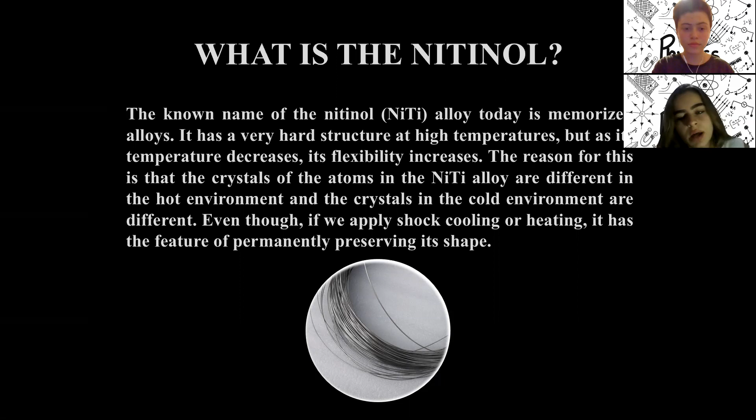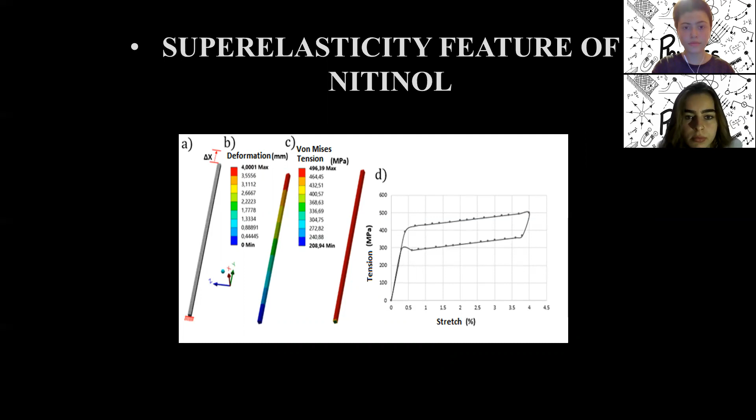Now I will focus on one of the properties of nitinol, which is shape memory. As many people know, the mechanism of the shape memory alloy works differently. If the internal crystal structure and shape of an object made from shape memory alloy is deformed, it will not return to its original shape when the force on it is removed. However, if you apply some heat, the deformed crystal structure changes to a different form, meaning it reverts to its programmed shape.

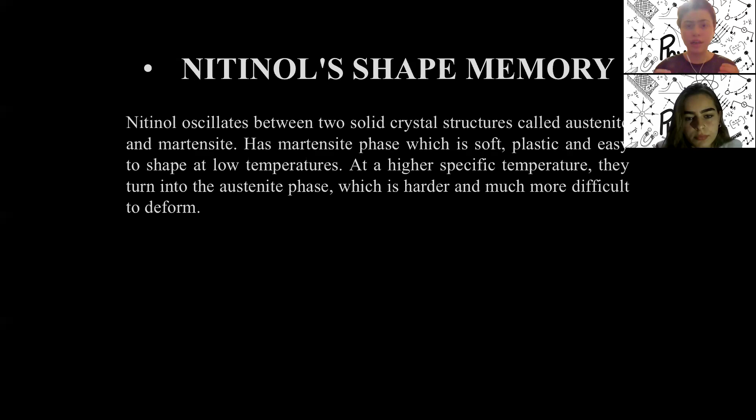Let's consider the advantages of nitinol. One of the important features that encourage the use of nitinol material is that it's economical. Not only is it low cost to set up, its power consumption is also low, and nitinol wires are very quiet during usage.

Nitinol wires will continue to function for a long time if they are not exposed to excessive voltage and heat and are used appropriately. Nitinol is more durable and long-lasting than other alloys, and due to its resistance to corrosion, it easily maintains functionality in places where other materials may fail.

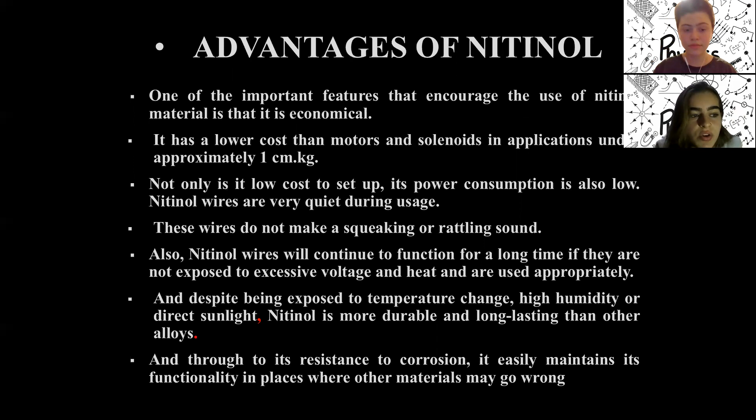Let us look at designing finite elements with ANSYS. ANSYS is a kind of simulation system, an FE simulation system, which helps engineers mostly during the design phase. This graph shows nitinol's martensitic phase and austenite phase, as well as the stretching and pressure areas.

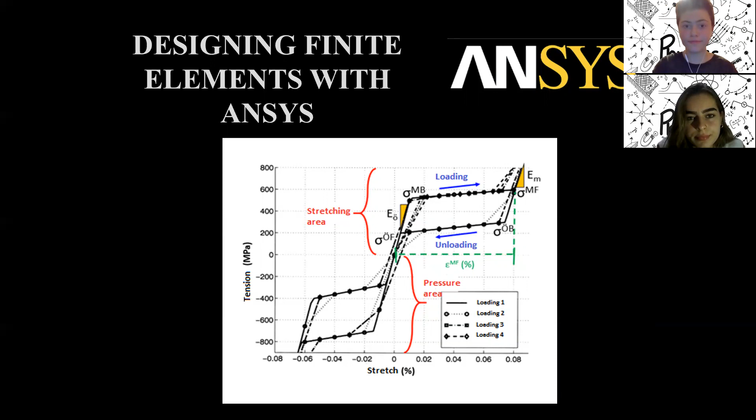Now I will talk about the application of it. We have decided to use the magnetron sputtering vacuum coating machine for the coating, and we have considered applying the nitinol in two ways: first, applying heat treatment with magnetron, and second, by spraying with a chemical solution.

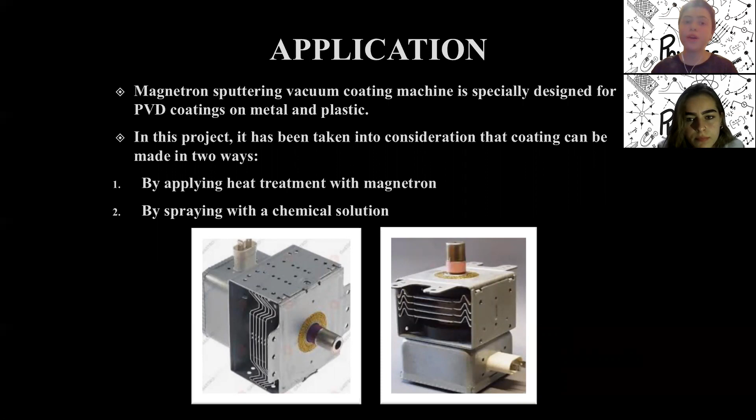There's a suggestion: as I mentioned, nitinol contains nickel, and nickel can cause irritation and allergic reactions in the skin if it contacts the human body. We decided to coat our nitinol with copper by the electrolysis method in our school's laboratory. As a result of this coating, nitinol became more usable and harmless.

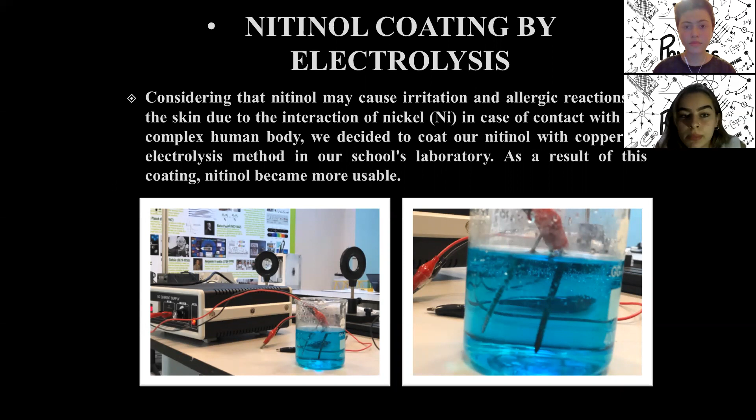Here is the formula of the experiment with copper using electrolysis. Our main goals here are, first, to ensure that nitinol remains more resistant to environmental conditions, and second, to reduce the effects of harmful nickel.

Furthermore, we have used copper to carry out our experiments, but you can also use vanadium pentoxide and vanadium tetroxide instead of copper, as we stated in the report.

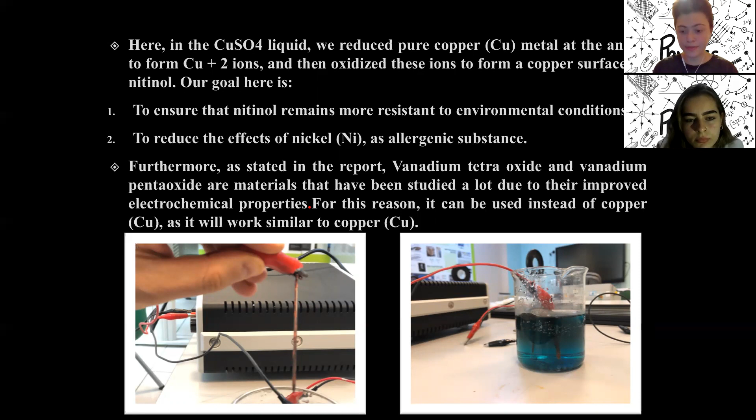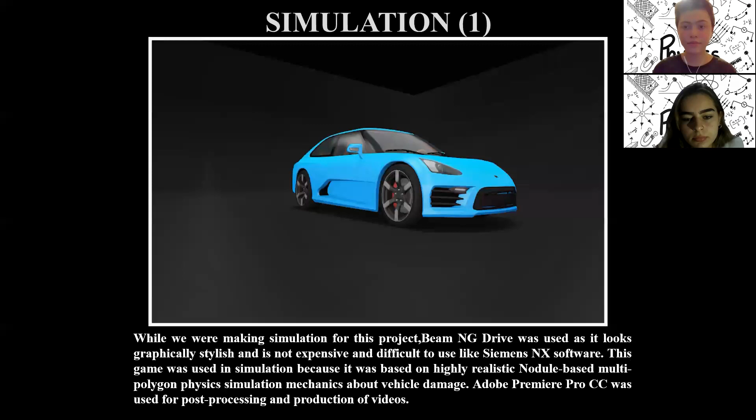Let's continue with the first simulation. This car is covered with nitinol. This car is not covered with nitinol.

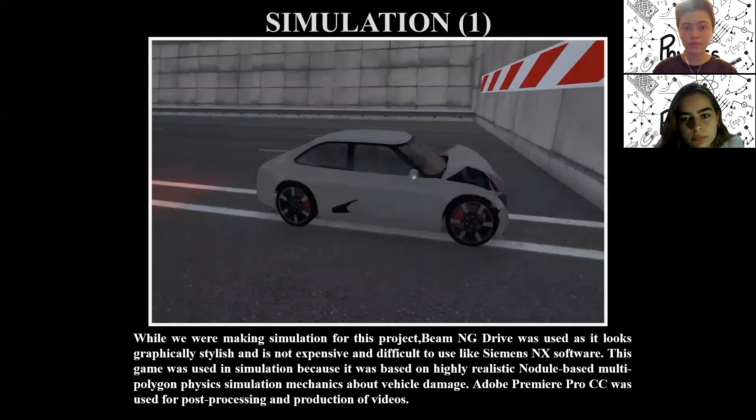We observed the difference clearly with this simulation. Let's look at another simulation too.

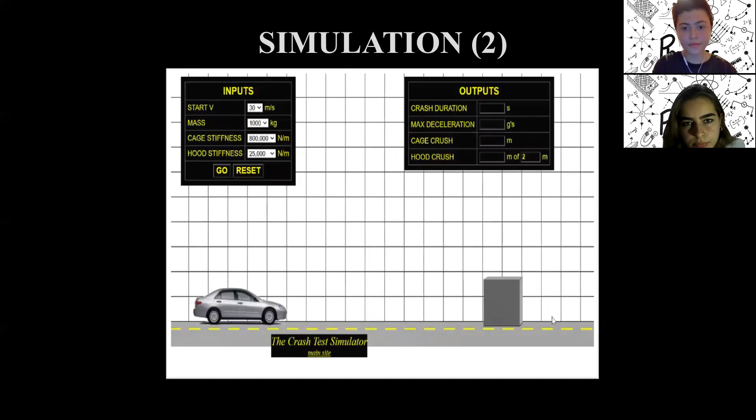We'll continue with the cost analysis. It was announced that there were 1.3 billion motor vehicles in the world in 2018. In 2020, this figure is estimated to approach 2 billion vehicles. Based on this, we say that our cost will be between $78 and $156.

Considering that the weight of nitinol costs $15 per kilogram and the way of transforming this idea into profit, 5 to 10 kilograms should be used depending on the size of the vehicle. If our cost is a maximum of $156 per vehicle, it will be sold for use in vehicles at $174 with 10% profitability. Here we want to reach at least 20% of this market. For example, if we apply this project to 260 million vehicles, our total income will reach approximately $4,063,381.

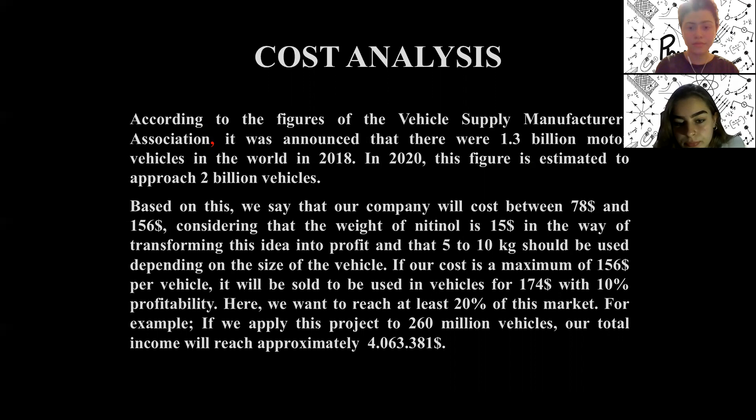In conclusion, our project has the property of being first in the literature. Furthermore, it's our national and domestic technology product, and we think it clearly shows the importance we attach to human life. Nitinol coating reduces vehicle damage by a minimum of 40%. We have observed that it provides serious advantages as it reduces the damage caused by loss of life and property.

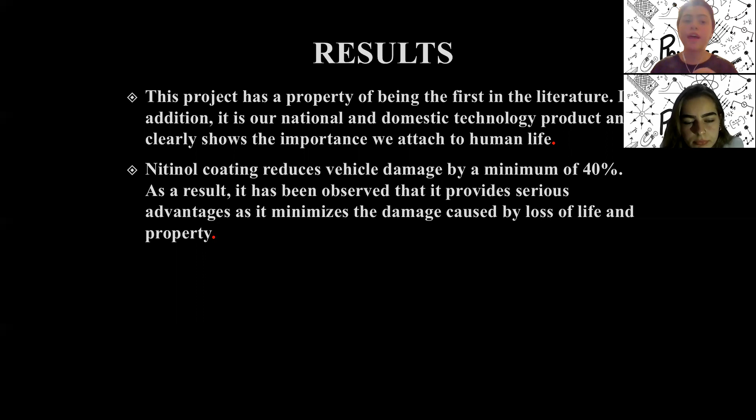As a last point, I would like to share our suggestions to develop our project. We said it before, but to reduce the harmful nickel interaction with the human body, we have experimented with copper, but you can also use vanadium pentoxide and vanadium tetroxide instead of copper.

In addition, it's important that the surface treatments are evaluated by clinical practice, and we must examine some chemical analyses independently too. At the end, if positive results are obtained from all stages of this research, it can be used as a coating on the exoskeleton of vehicles.